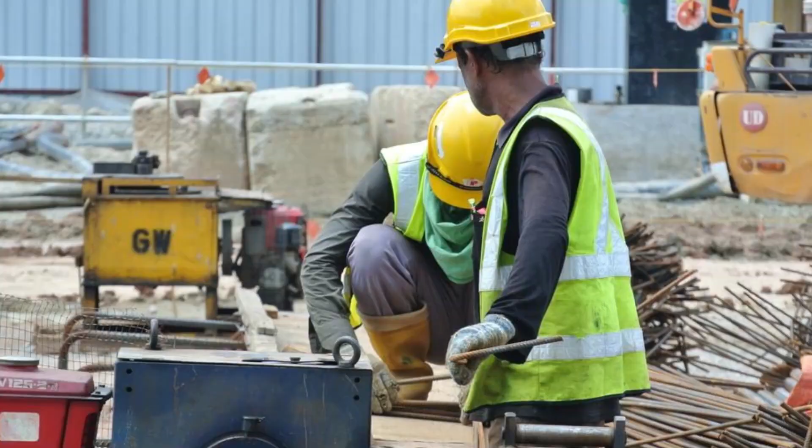Today, I'm excited to show you how to create a bar bending schedule using the BBS Plus Platinum. It's a great tool for preparation of BBS, optimizing your rebar usage and also reducing wastage.

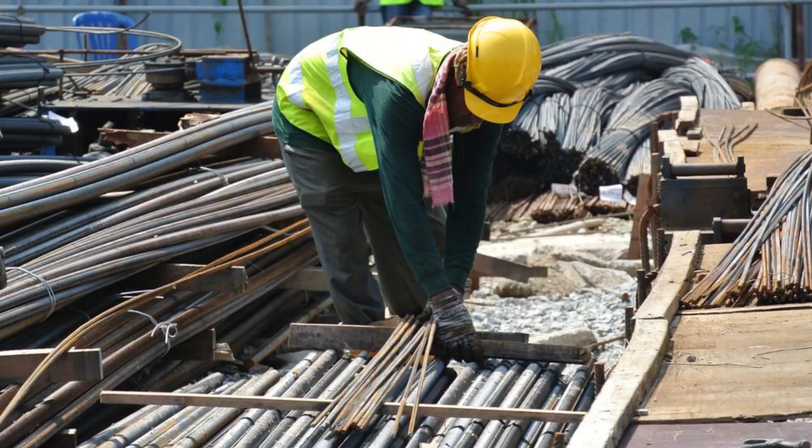I've got something extra special for you - the BBS Plus Platinum version 24. Yes, you heard that right. With this video, I will showcase the new feature introduced in BBS Plus Platinum version 24.

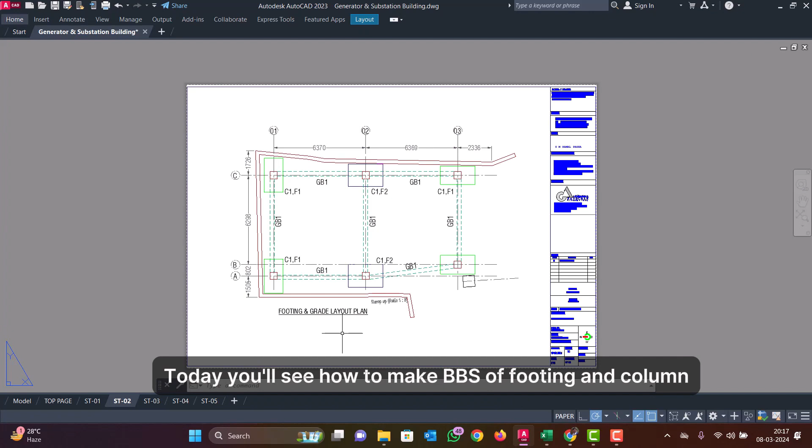Today you'll see how to make bar bending schedule of footing and column. For that, I have taken a sample drawing of footing and column. To make the BBS, I will be using BBS Plus Platinum version 24. This is the latest version.

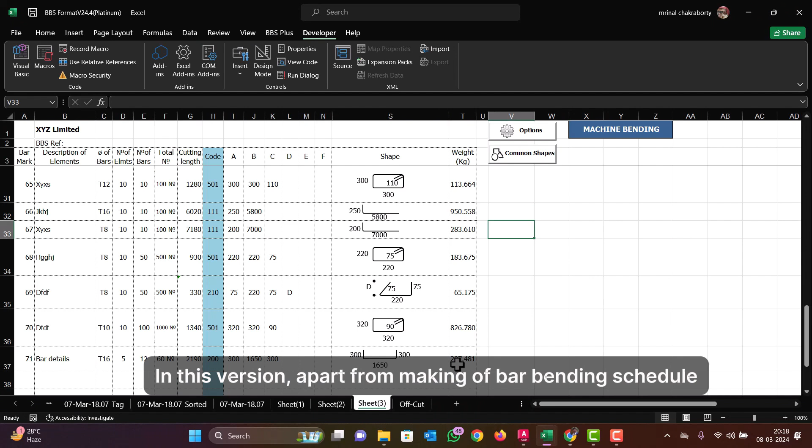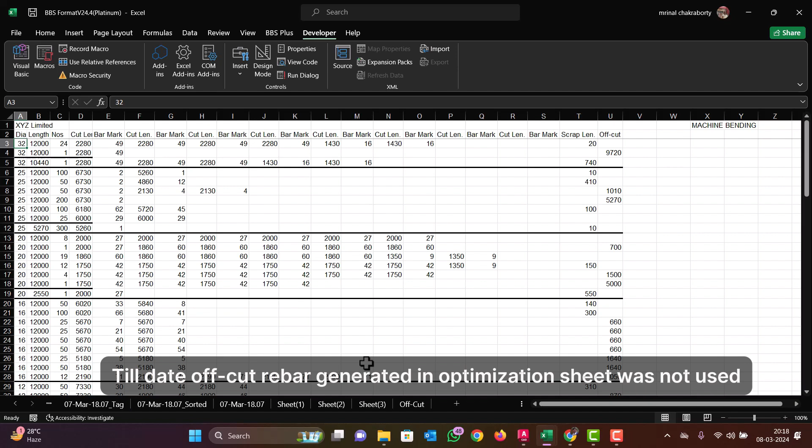In this version, apart from making of bar bending schedule and tag generation, a new feature is introduced in optimization. Till date off-cut rebar generated in optimization sheet was not used, but now an off-cut sheet is included, which will save all the off-cut from optimization sheet.

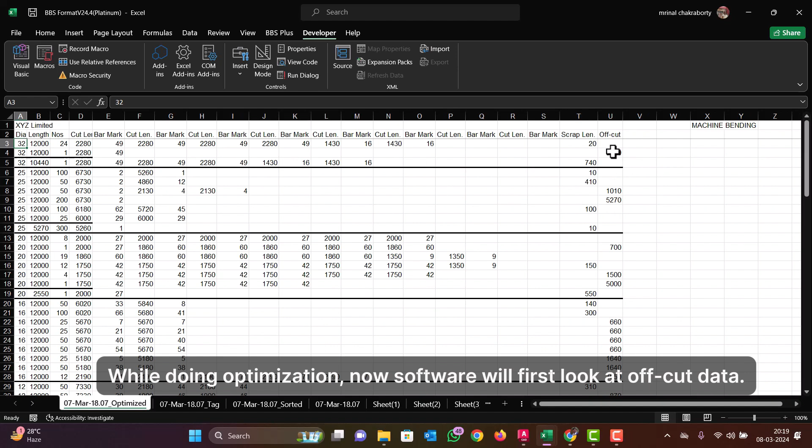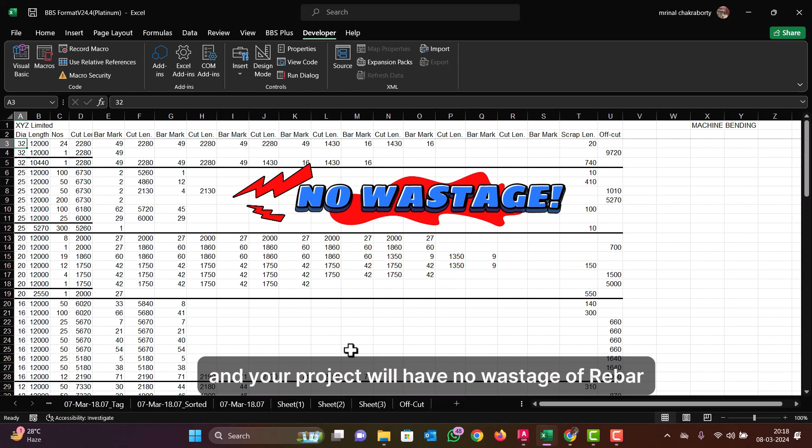While doing optimization, now software will first look at off-cut data. If any usable bar is available, then it will take from there. After that, only it will search in full-length bar. This will ensure off-cut bars are used most, and your project will have no wastage of rebar.

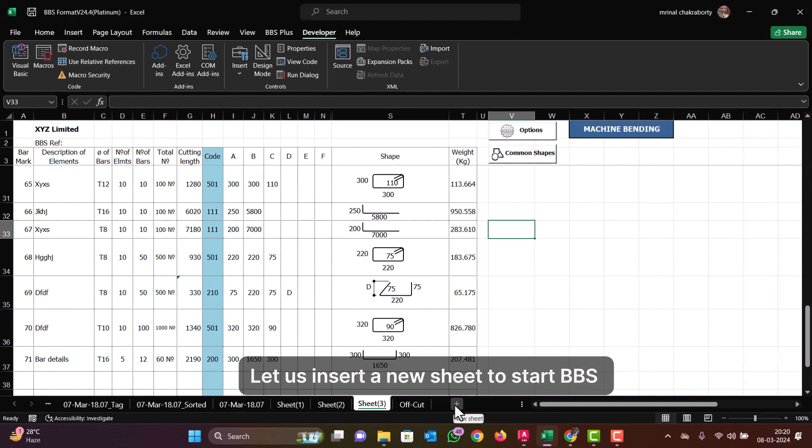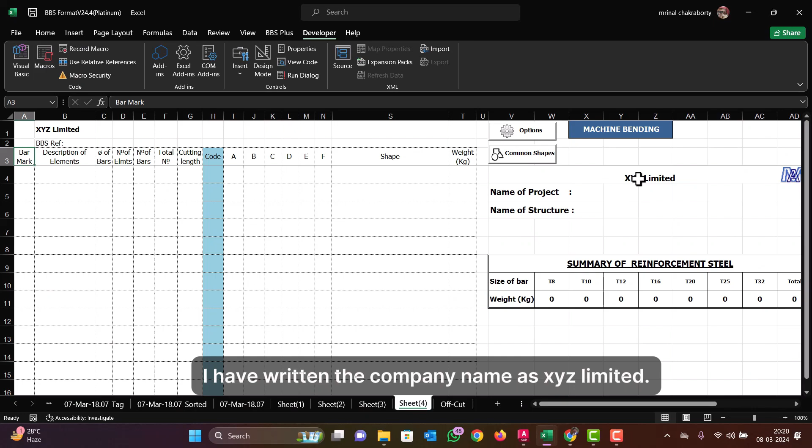Let us insert a new sheet to start BBS. Software will ask you to select BBS format or balance sheet. Click Insert BBS format. I have written the company name as XYZ Limited.

You can customize company name, project name, structure. You can update this in template sheet. Whatever data you will write will be available in all new sheets. You can even change the logo from here. When you save, a new sheet as per template data will be inserted.

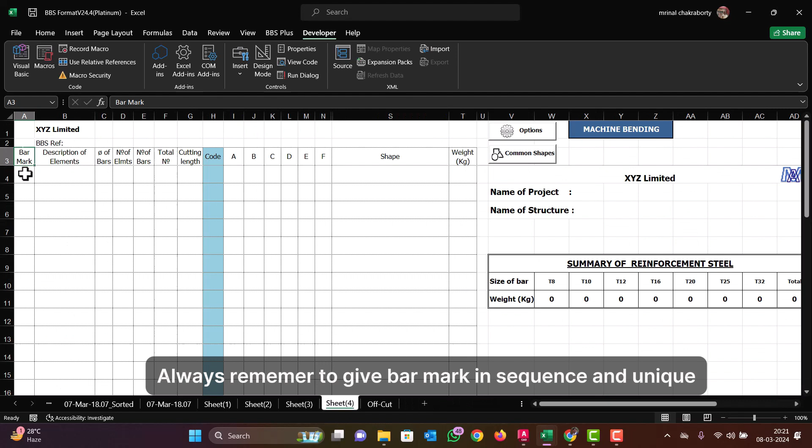Let us delete the extra sheet. Always remember to give bar mark in sequence and unique. This will help you to identify the bar from tag by the bar mark. In this case, sheet 1 having serial up to 4, sheet 2 up to 37, sheet 3 up to 71. Hence, I will start sheet 4 with 72.

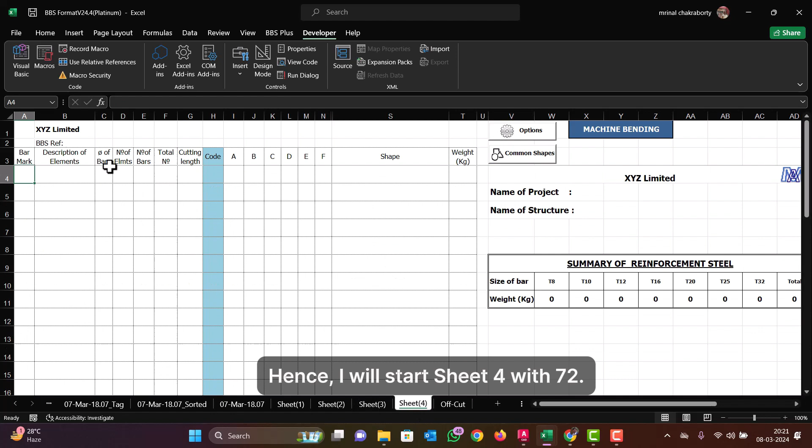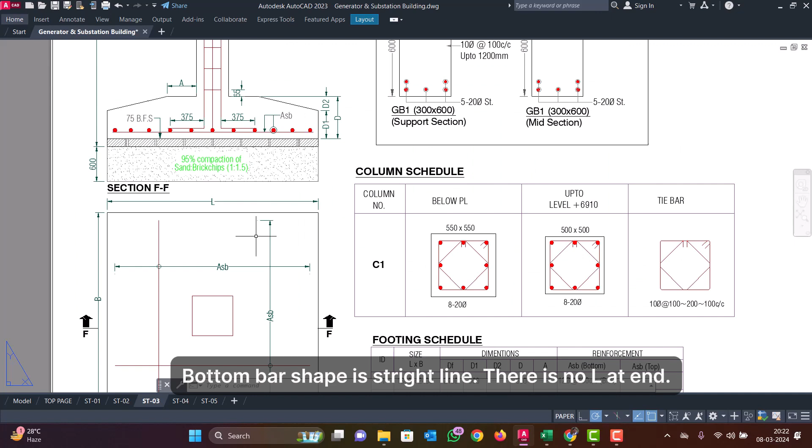Let us check the drawing. We are having four numbers F1 and 2 numbers F2 footing. Size of F1 is 1300 by 2400. We are considering 50 millimeters cover. Bottom bar shape is straight line. There is no L at end. To calculate the number of bar, we have to remember L side is 1300 and B side is 2400.

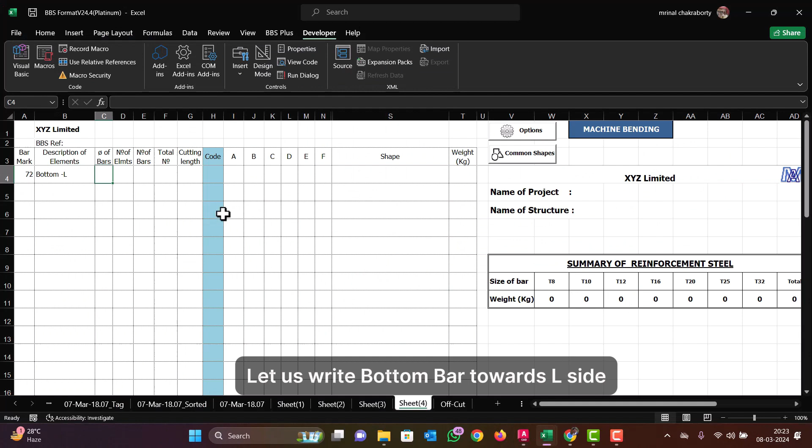Rebar is 12 tor 100 center to center. Let us write bottom bar towards L side. Dia of bar is 12 millimeters. Number of elements will be number of footing. We have four numbers F1, so we will write 4.

To calculate number of bar, we will take the length of B, that is 2400. Then deduct two times cover, then divide by rebar spacing 100. Then add 1. Apply round formula to avoid any fraction in number.

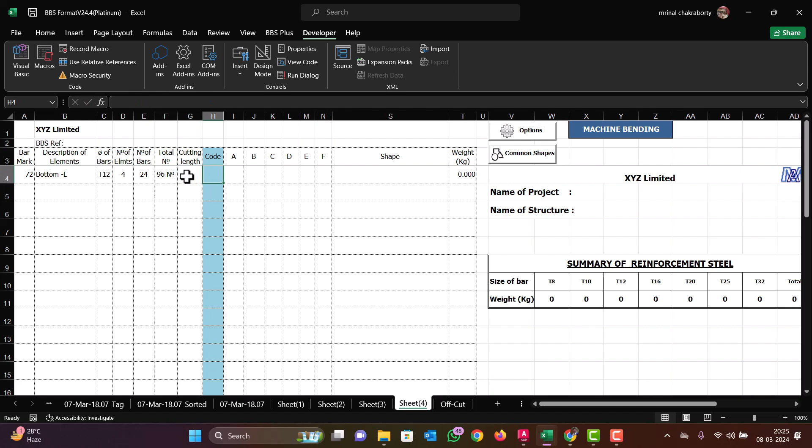Next we have to write code number. Click common shape to get the commonly used shape code. Code of straight rod is 100. Length of the bar will be length of side L: 1300 minus two times cover. Now bottom B.

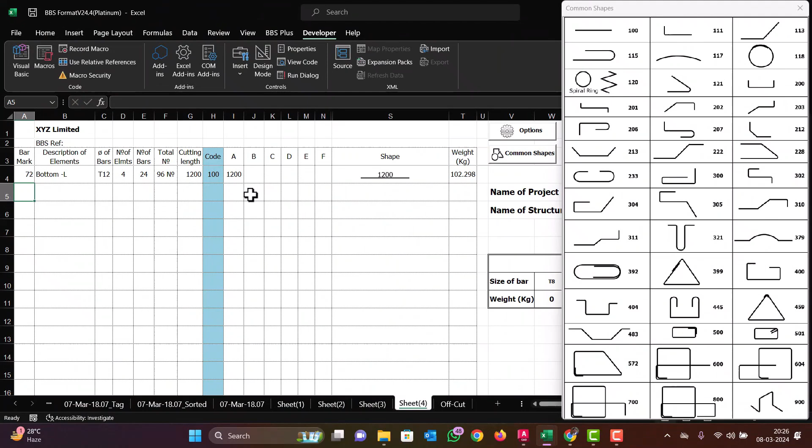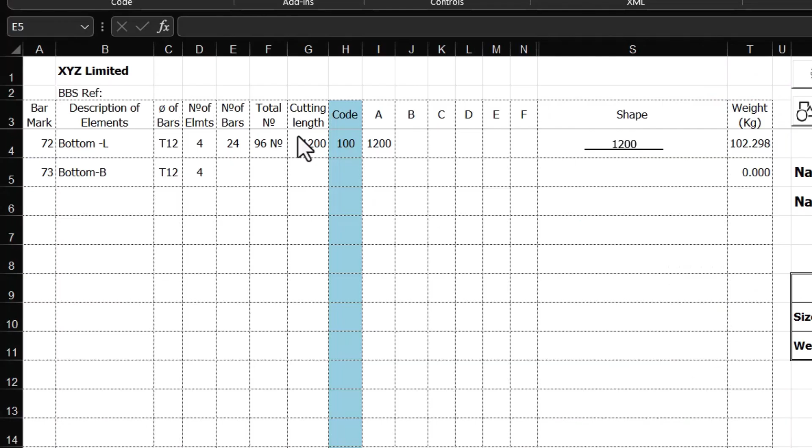Dia of bar 12 millimeters. Number of element is 4. To calculate number of bar this time, we have to consider length L. Copy the above formula and change the length to 1300. Shape code 100. Length 2400 minus two times cover.

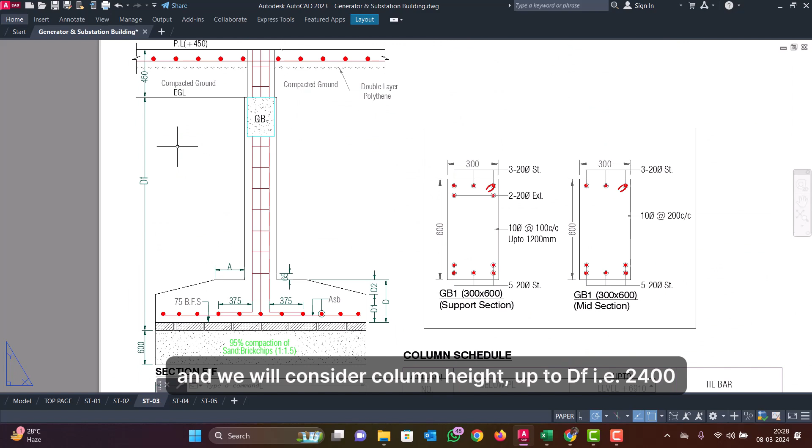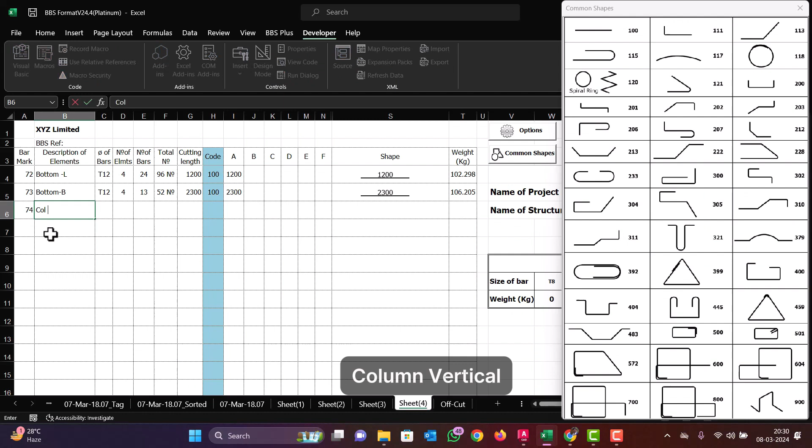Next we will write BBS for column. Our column size is 550 by 550, and we will consider column height up to DF, that is 2400. Column rebar is 8 numbers 20 mm dia bar. Bar mark 74. Column vertical. Dia 20. Number of element 4. Number of bar 8. Now find the shape code of L-shaped bar, which is 111.

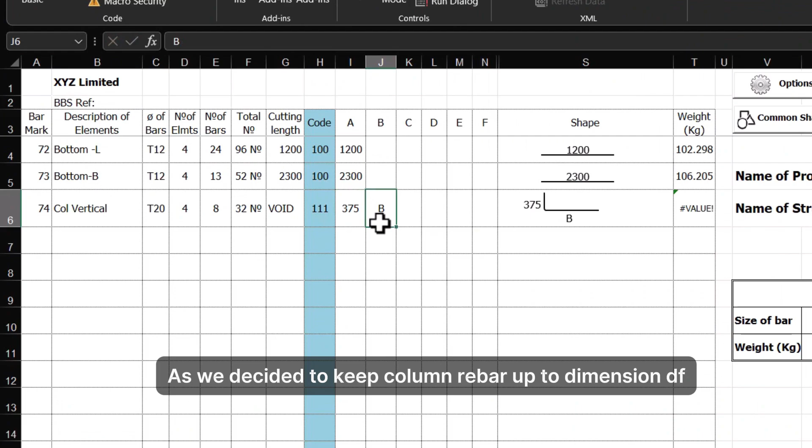Dimension is given in drawing as 375. As we decided to keep column rebar up to dimension DF, dimension B will be value of DF, that is 2400 minus cover 50 and BFS 75.

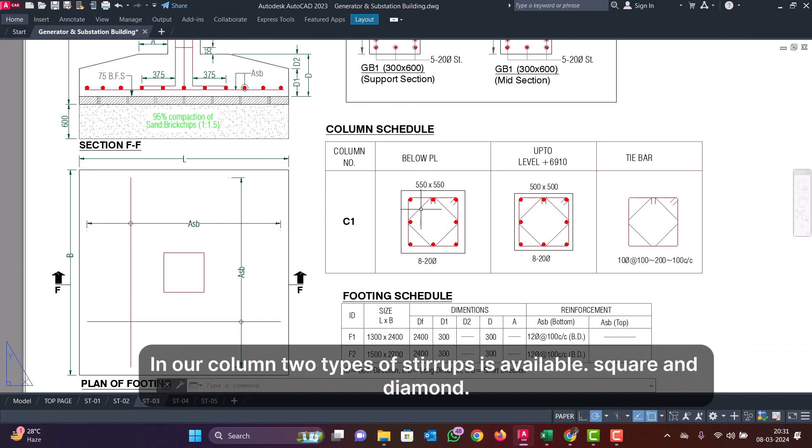Now a time for stirrups or column ties. In our column, 2 types of stirrups is available: square and diamond. 10 mm bar dia 100 center to center. Let us consider column cover as 40 mm. For identification, we can write footing number and description.

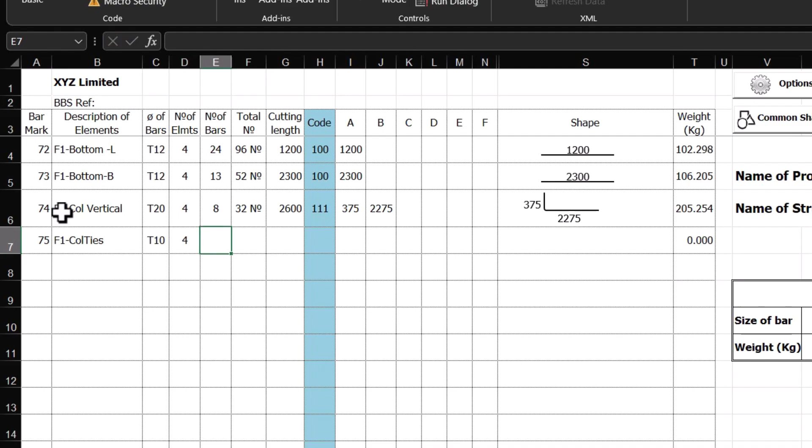Let us enter detail of ties. Dia of bar 10 mm, number of element 4. To get length where ties will be placed, we have to consider value of DF 2400 minus BFS 75 minus footing depth 300 minus 65 clear and then minus GB 600.

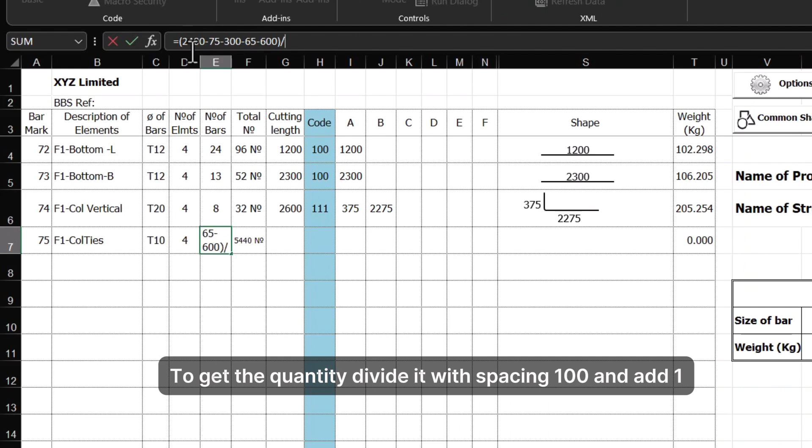To get the quantity, divide with spacing 100 and add 1. Apply round to avoid fraction in number. Next we have to write code number.

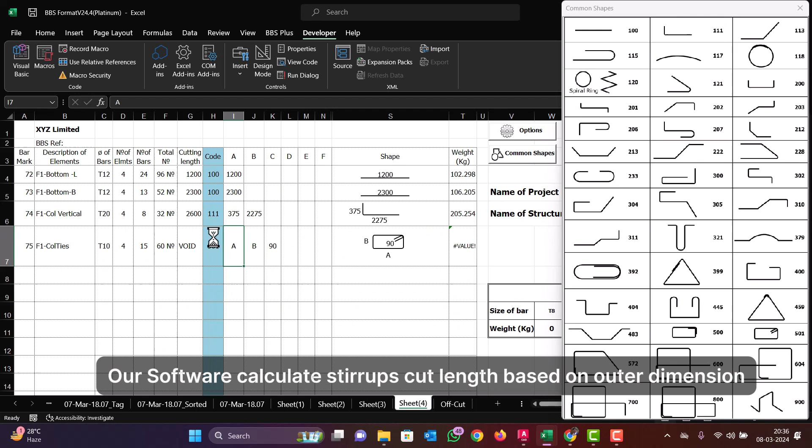Shape code for column ties with 135-degree hook is 501. Enter shape code 501. Our software calculates stirrups cut length based on outer dimension. Value of A will be column dimension 550 minus two times cover 40. Value of dimension B will be same as dimension A.

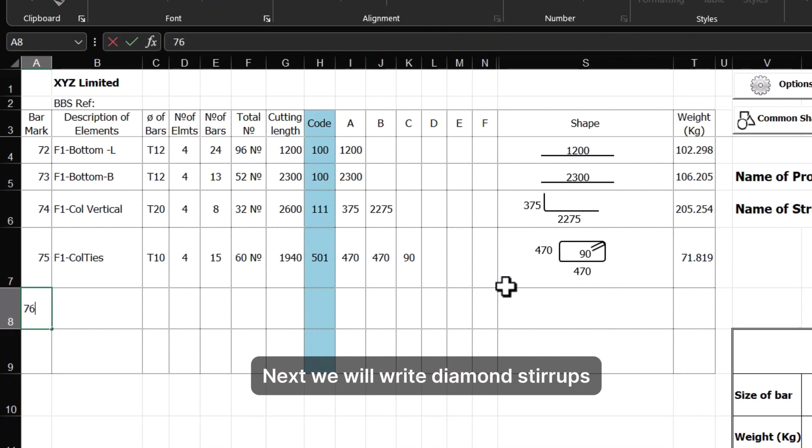Next we will write diamond stirrups. Bar mark 76, F1 column ties 2, 10 mm bar, number of element 4. Number of bar 15 as above.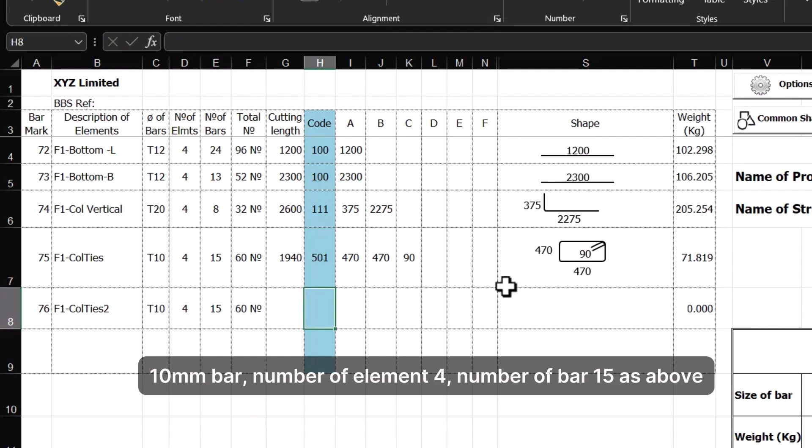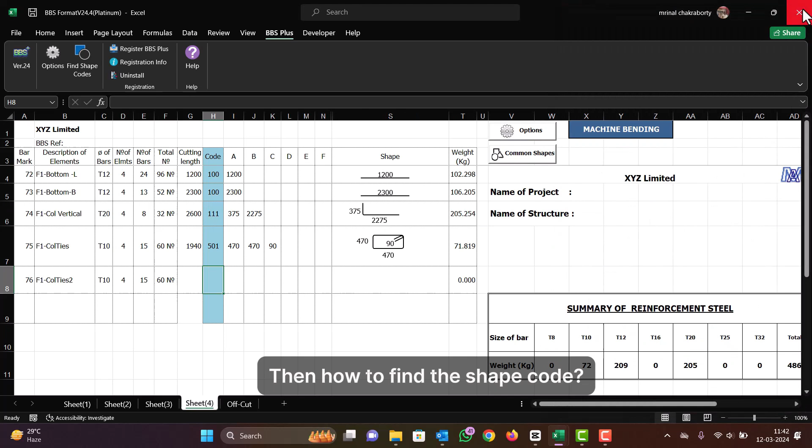Now we have to find diamond shaped stirrups. In common shape floating window, this shape is not available. Then how to find the shape code? In BBS Plus tab, click Find Shape Codes.

You can filter with number of angle and curve. For easy solution, click Show All. This will show all working shapes. From here we are seeing that code of diamond stirrup is 588.

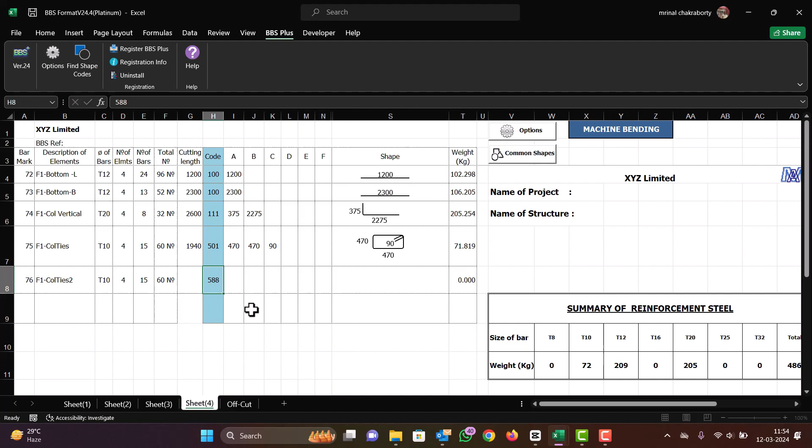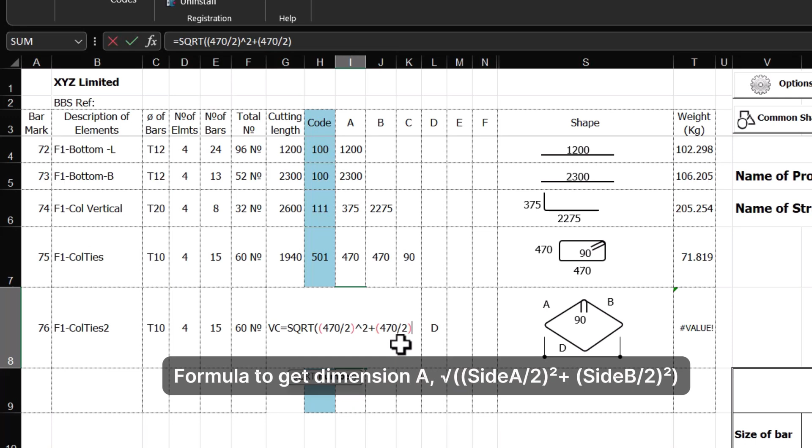Formula to get dimension A would be square root of summation of half of each side square. Apply round formula to avoid fraction.

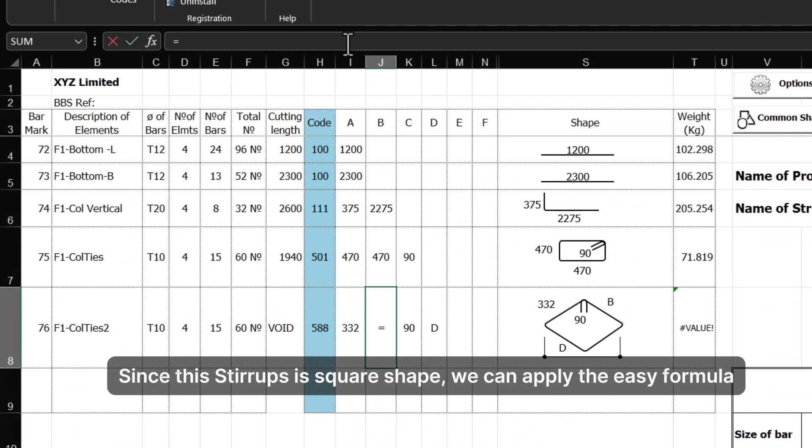Since this stirrups is square shape, we can apply the easy formula: square root of 2 multiplied by half of each side. Hook length is coming through formula. Dimension D is for reference only.

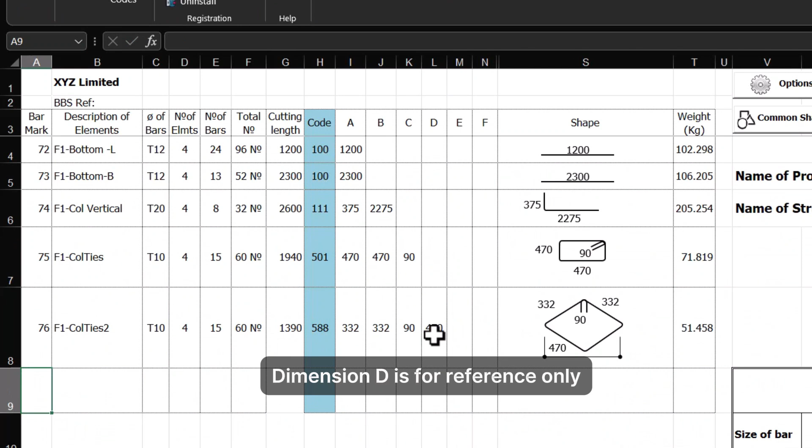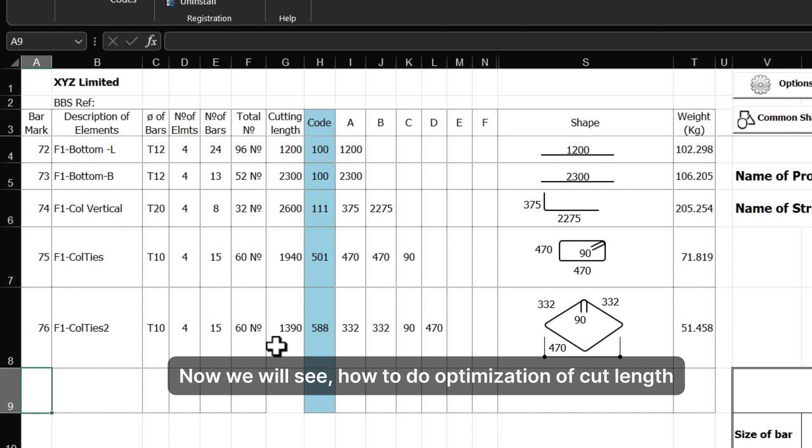We have completed the footing and column BBS. Now we will see how to do optimization of cut length and also generate tag.

excelinlife365.com. It's time to optimize cut length. Before that, we will do consolidation. We will consolidate other 3 sheets we have done earlier.

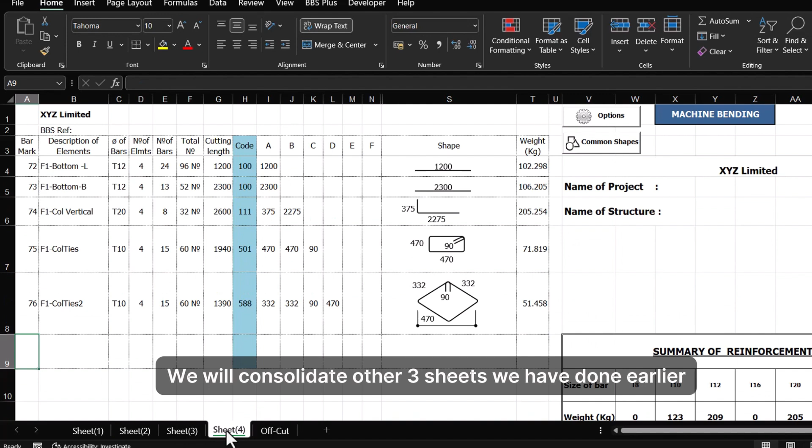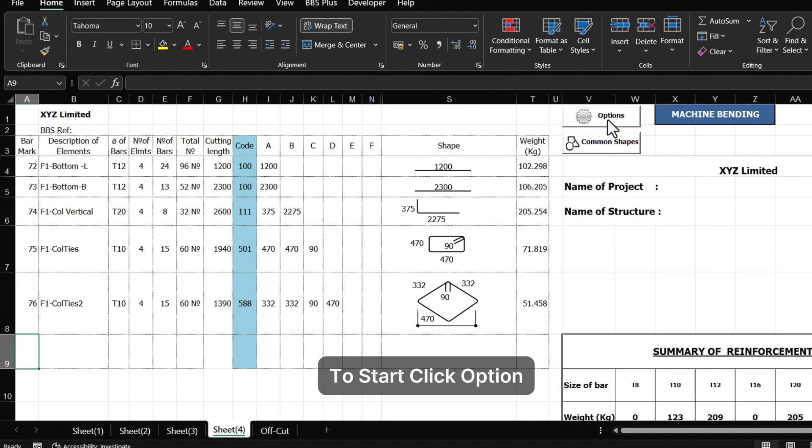We have listed some off-cut rebar in this sheet. This will be used during optimization. To start, click Option, then click Consolidate.

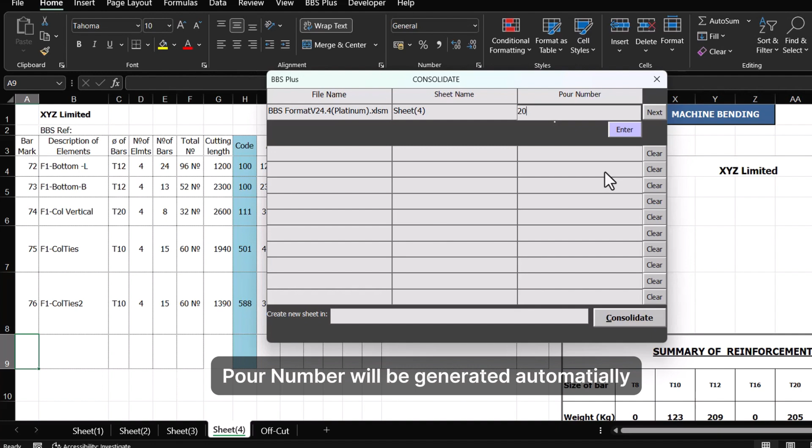Selected sheet name will be visible. Pour number will be generated automatically. Click Enter to include in list. If next sheet comes automatically, then click Enter to include.

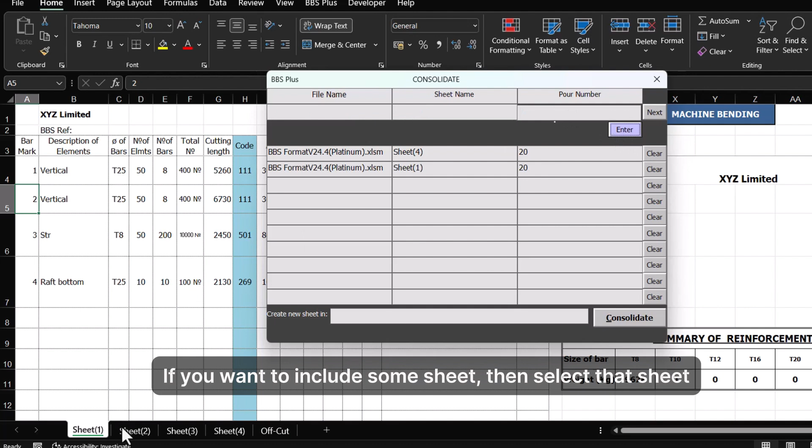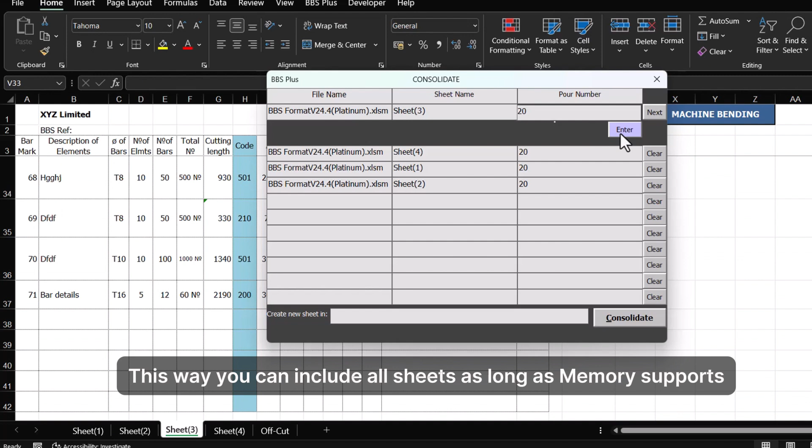If you want to include some sheet, then select that sheet. After that, click Pour Number. Your sheet will be displayed. Then click Enter. This way you can include all sheets as long as memory supports.

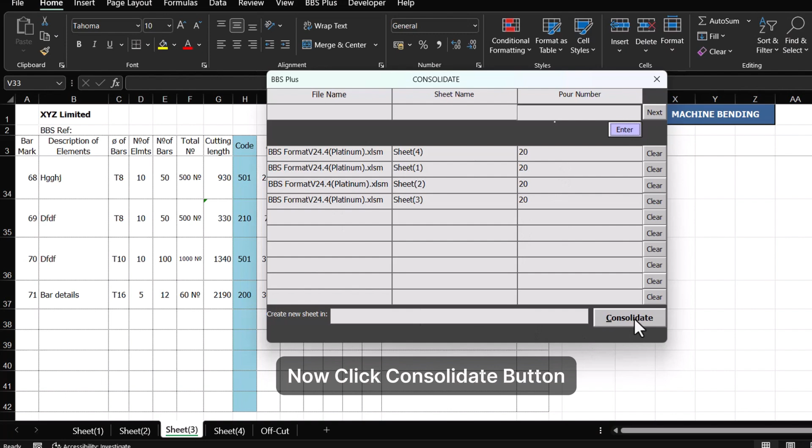Click Clear to remove any sheet from the list. Now click Consolidate button, it will consolidate all the selected sheet in a new sheet. New sheet named based on date and time.

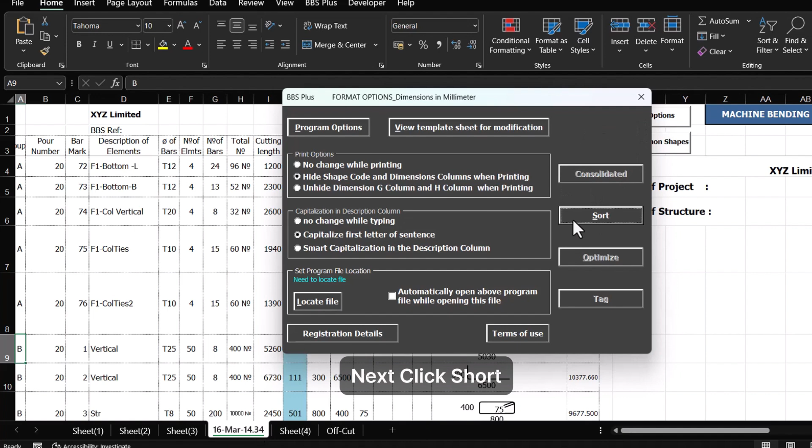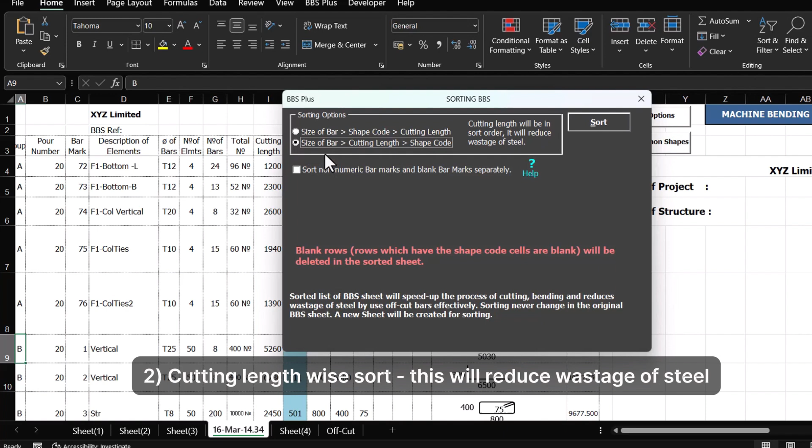Next, click Sort. There are two sorting options available. One, shape code-wise sort, which is convenient for bending. Two, cutting lengthwise sort, this will reduce wastage of steel.

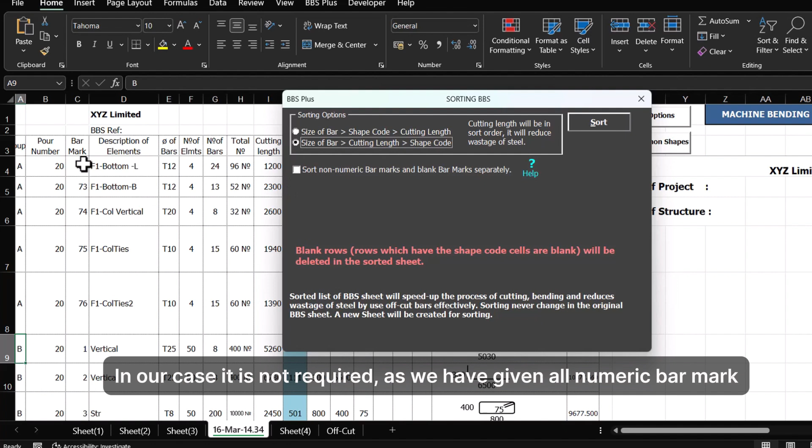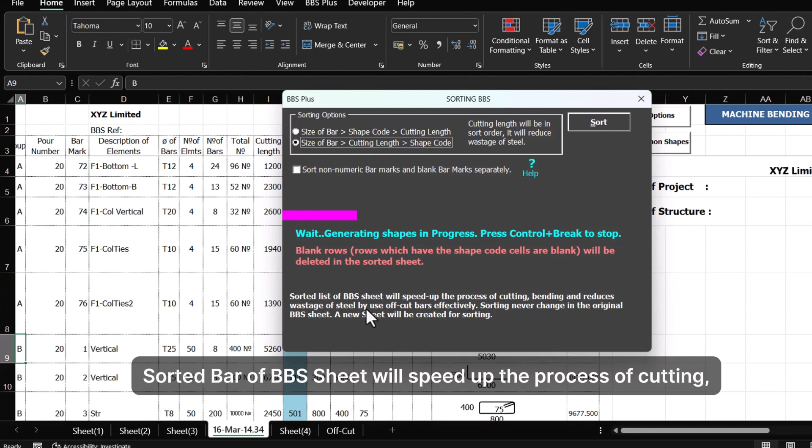You can keep non-numeric bar mark separate during sort. In our case, it is not required, as we have given all numeric bar mark. Click to sort. Sorted list of BBS sheet will speed up the process of cutting, bending, and reduces wastage by

use of off-cut bar effectively. Sorting never changed the original BBS sheet. A new sheet will be created for sorting.

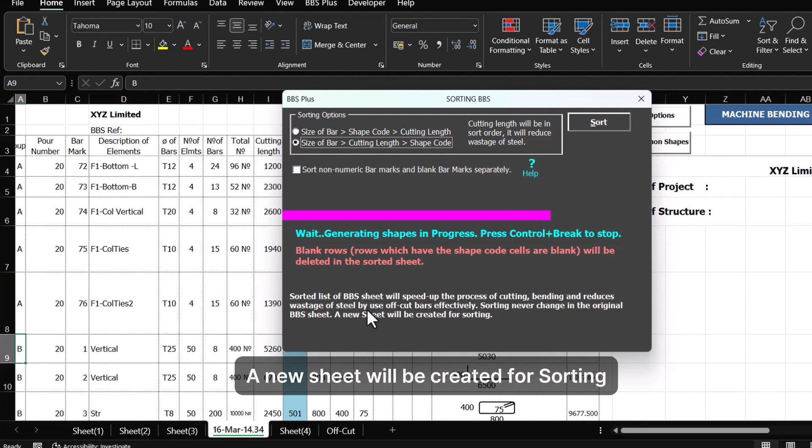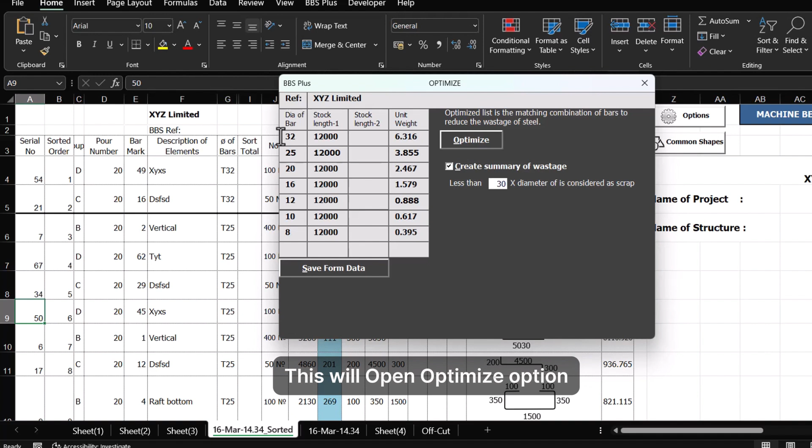Once sorting is completed, click Optimize. This will open Optimize option. Here, dia-wise stock length can be entered. Tick the summary of wastage.

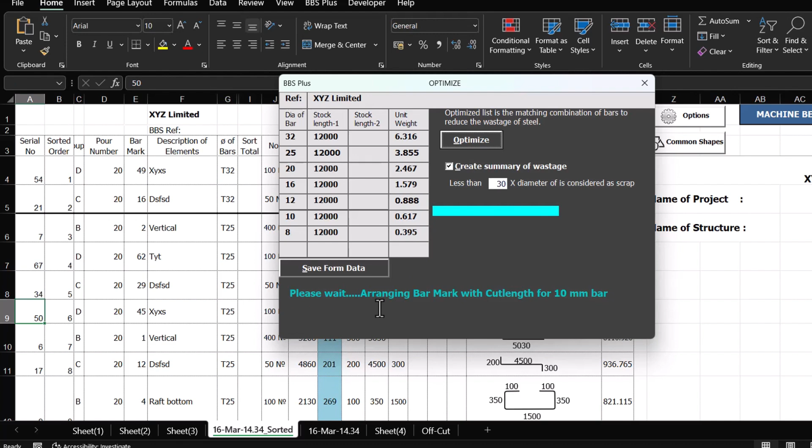By default, 30 times diameter is set as scrap, but you can change to any figure from 10 to 500. This will optimize cut lengths as per selected option. Remember, you can optimize and generate tag multiple times, selecting the sorted sheet.

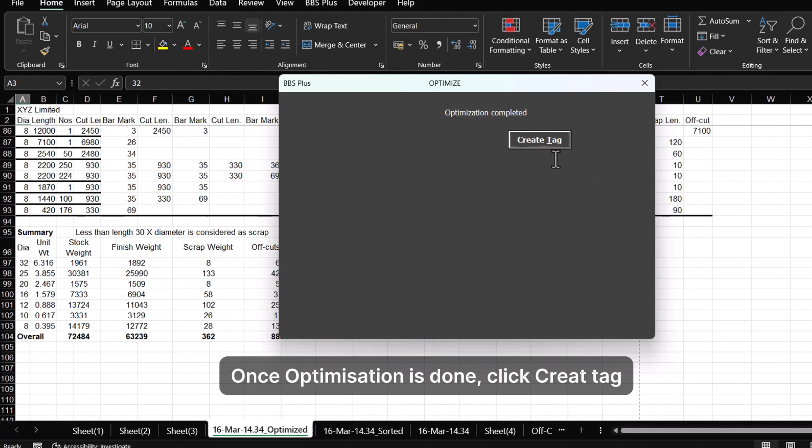Once optimization is done, click Create Tag. Production sequence numbers comes automatically. You can enter other details like order reference, project, schedule reference.

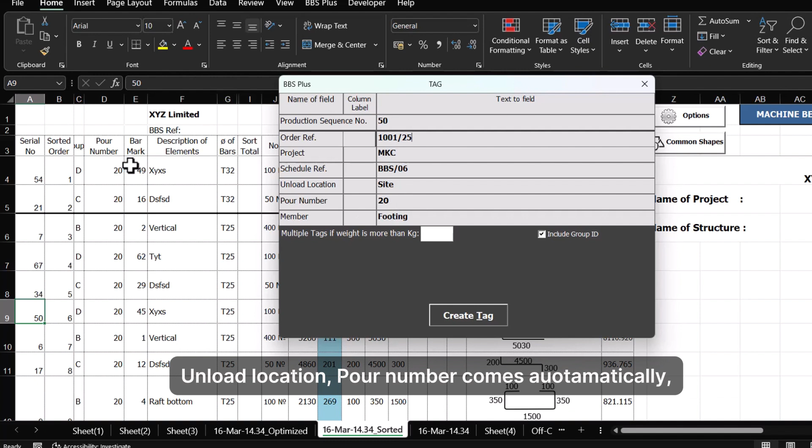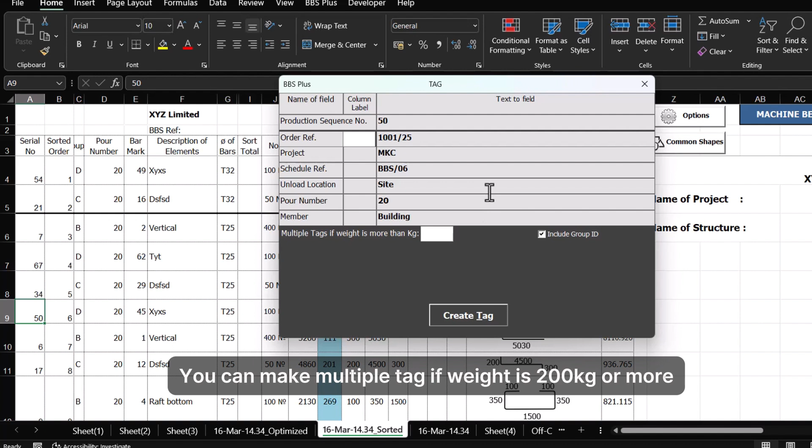Unload location, pour number comes all automatically. You can change any data like we are changing member detail. You can make multiple tag if weight is 200 kilograms or more. Click Create Tag.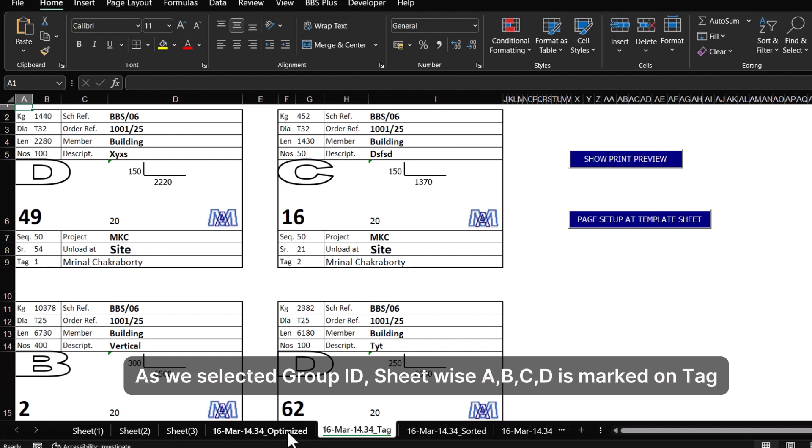As we selected Group ID, sheet-wise ABCD is marked on tag. In this tag, you can see our column vertical with bar mark, shapes, weight, numbers, etc. Similarly, all tags are taken from the BBS we prepared.

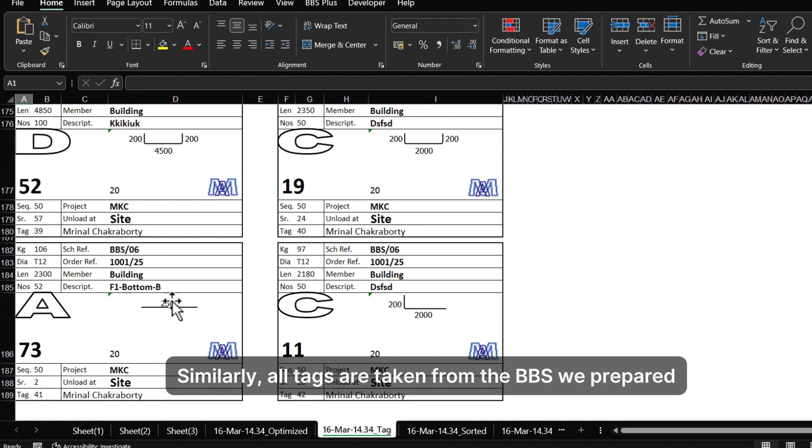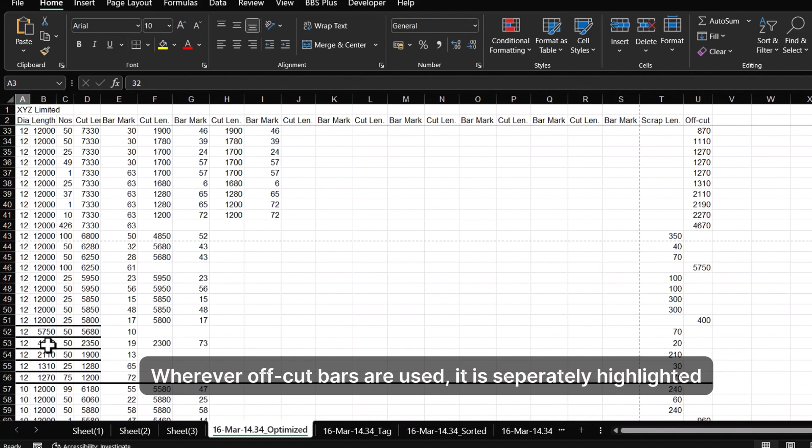In this optimized sheet, off-cut bars are properly used. Wherever off-cut bars are used, it is separately highlighted. This will prove how BBS Plus Platinum is saving your cost.

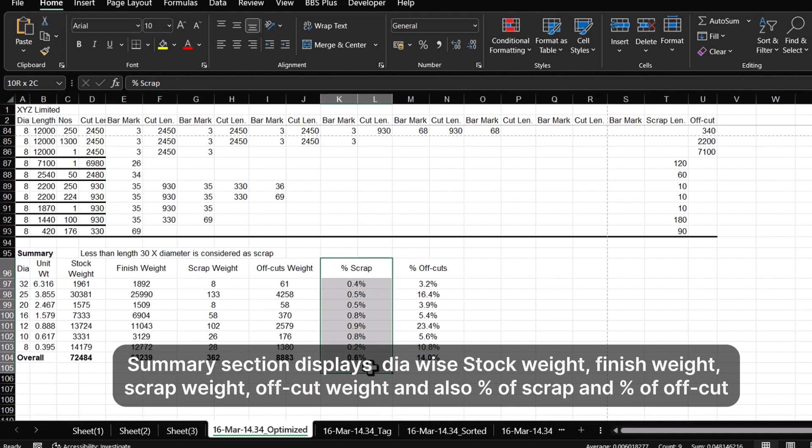Summary section displays dia-wise stock weight, finish weight, scrap weight, off-cut weight, and also percent of scrap and percent of off-cut. In this example, we are getting 0.6% scrap. This will vary based on the BBS.

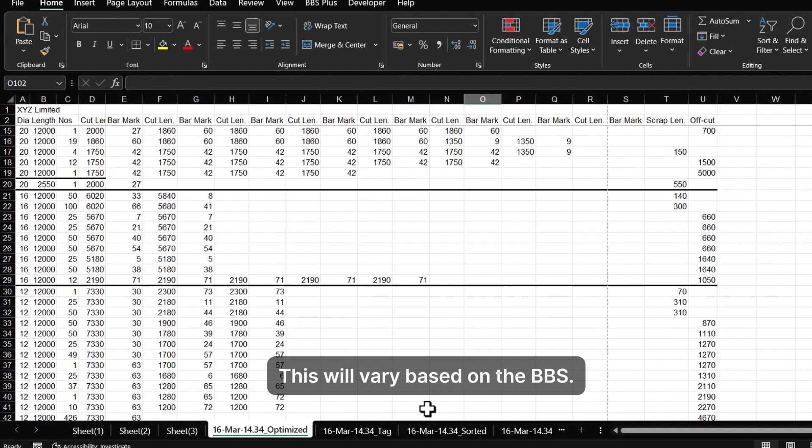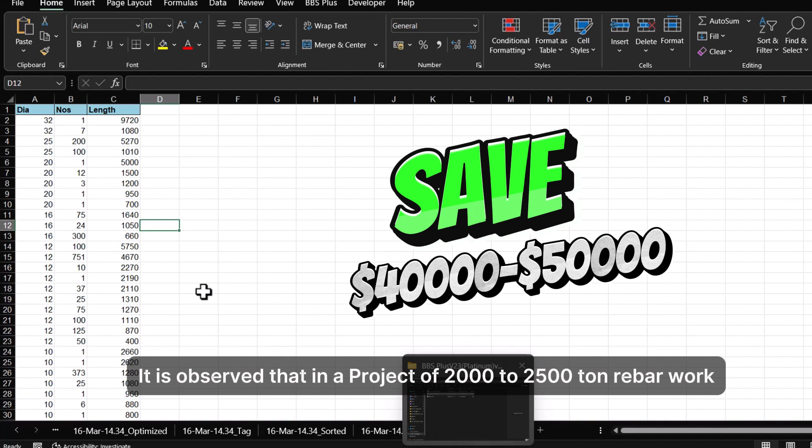Off-cut is updated with the off-cut data from the optimized sheet. It is observed that in a project of 2,000 to 2,500 ton rebar work, you can save $40,000 to $50,000.

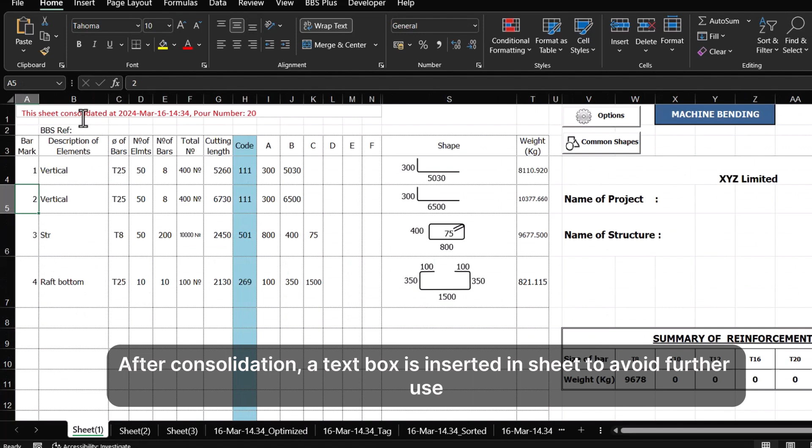After consolidation, a text box is inserted in sheet to avoid further use. To reuse this sheet, you have to delete this text box first.

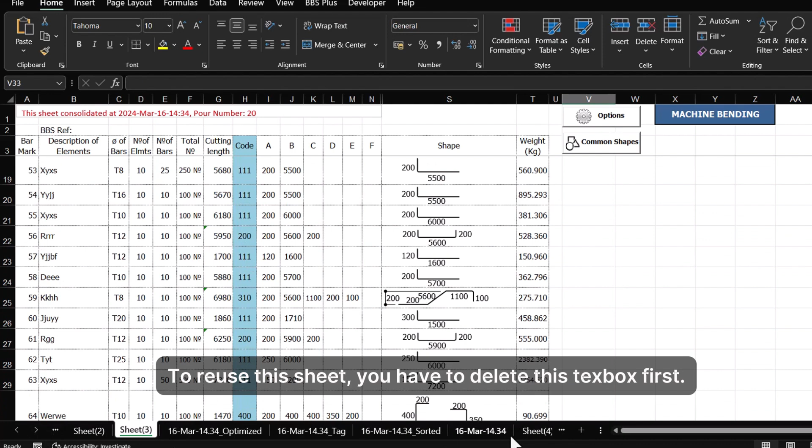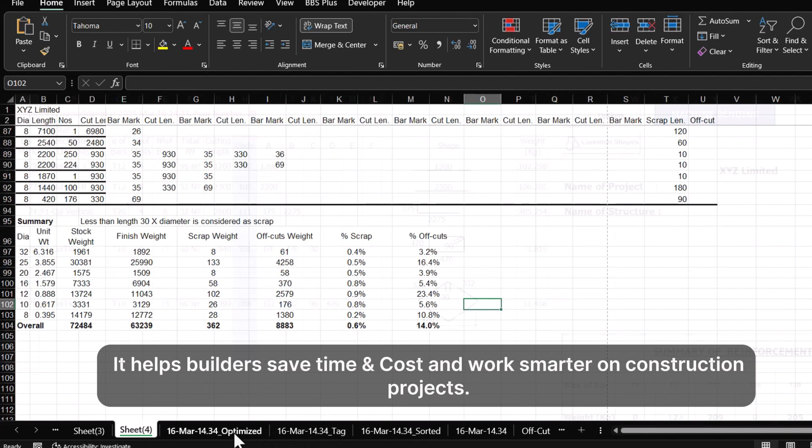In summary, we've learned about BBS Plus Platinum, a helpful tool for making bar bending schedules. It helps builders save time and cost and work smarter on construction projects.

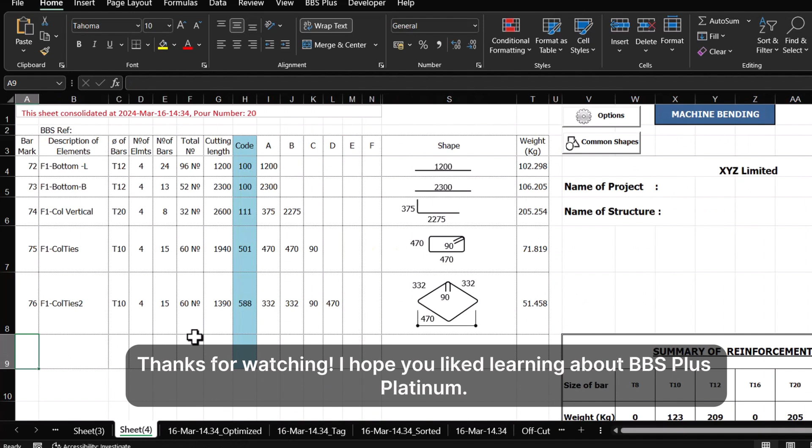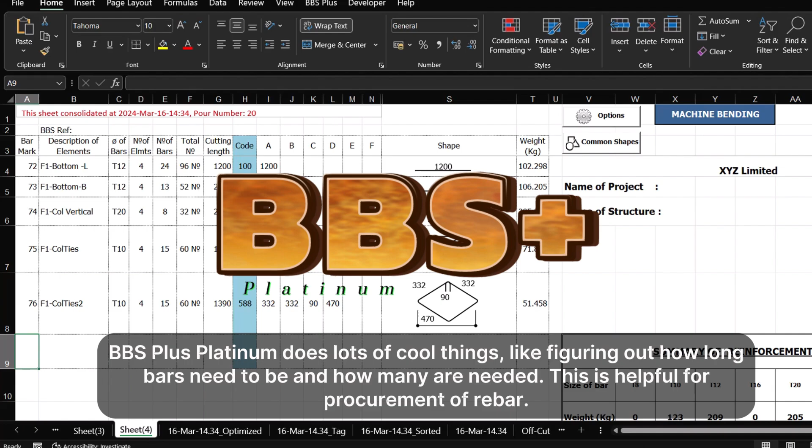BBS Plus Platinum does lots of cool things, like figuring out how long bars need to be and how many are needed. This is helpful for procurement of rebar.